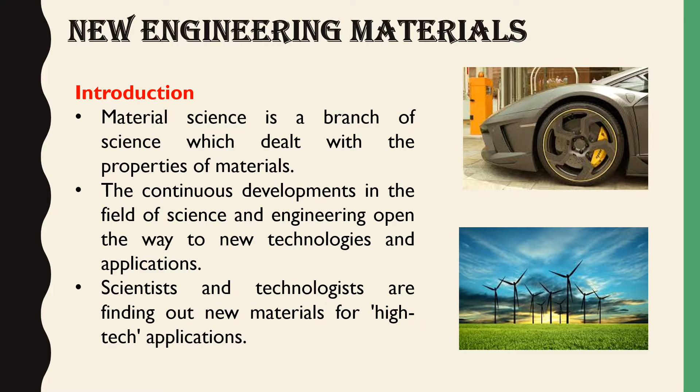Fast growing fields such as electronics, photonics, photoelasticity, fiber optics, and laser technology require efficient and stable new engineering materials. Hence, they must possess novel properties like large optical nonlinearities, optoelectronic properties, high sensitivity to light, and large thermal and electrical conductivities. They should also have good mechanical strength, toughness, ductility, and lightness.

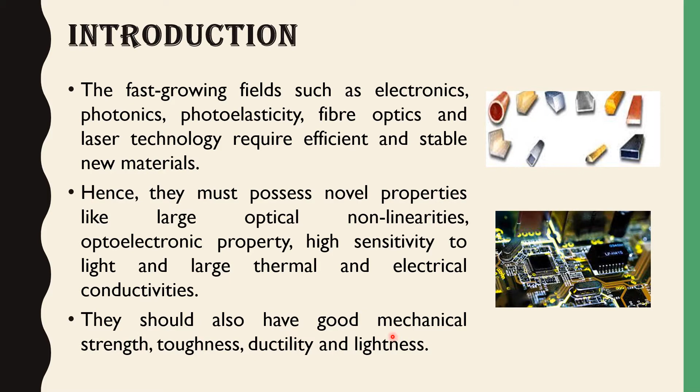Materials used in high-tech applications are usually designed for maximum performance and are normally expensive. Examples include titanium alloys for supersonic aeroplanes, magnetic alloys for computer disks, and special ceramics for the heat shield of space shuttles.

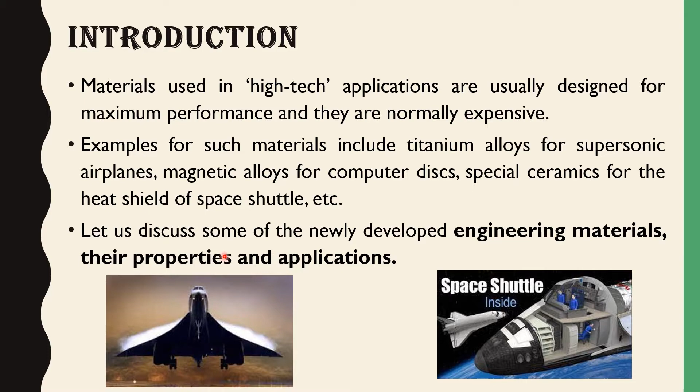Let's see some newly developed engineering materials, their properties and applications.

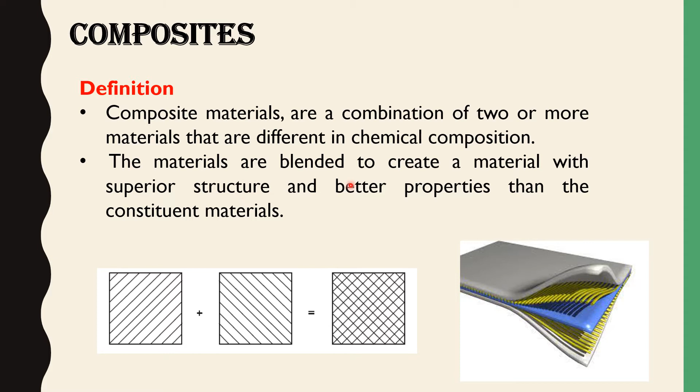Composites are a combination of two or more materials that differ in chemical composition, blended to create a material with superior structure and better properties than their constituent materials. Composite materials can combine plastics, metals, fibers, or ceramics. However, the properties of a composite material depend on the properties, structure, and proportion of its constituent materials.

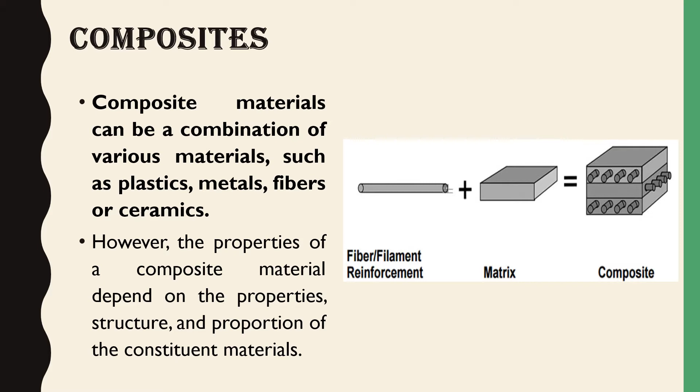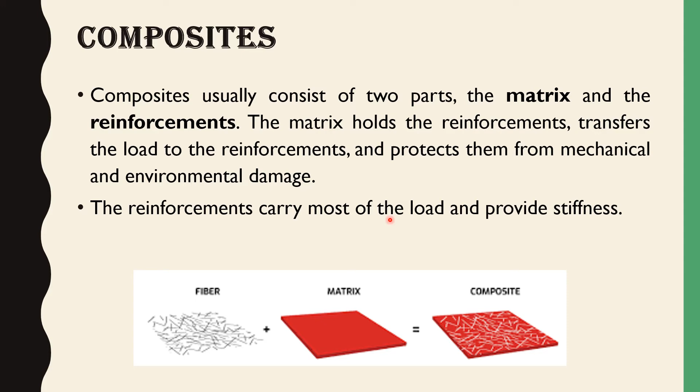Composites usually consist of two parts: the matrix and the reinforcements. The matrix holds the reinforcements, transfers the load to them, and protects them from mechanical and environmental damage. The reinforcements carry most of the load and provide stiffness.

Some composite materials exhibit better properties than their constituent materials such as metals or plastics. Therefore, composite materials are preferred over other materials in applications such as aircraft manufacturing, space vehicles, electronics, and sporting goods.

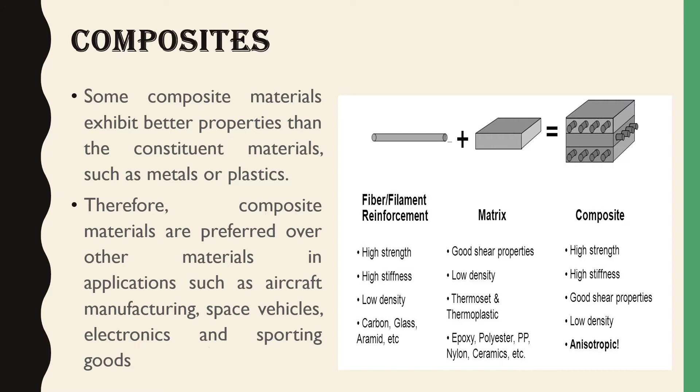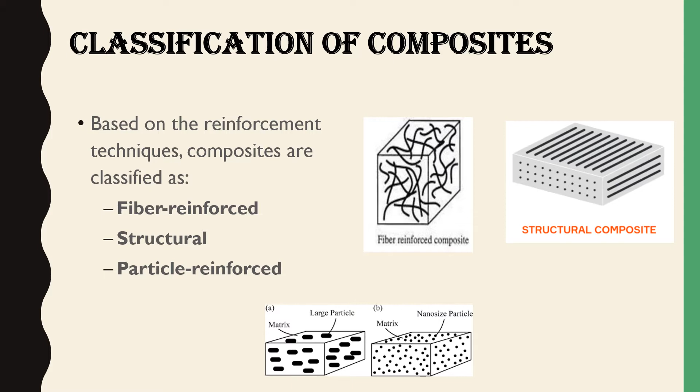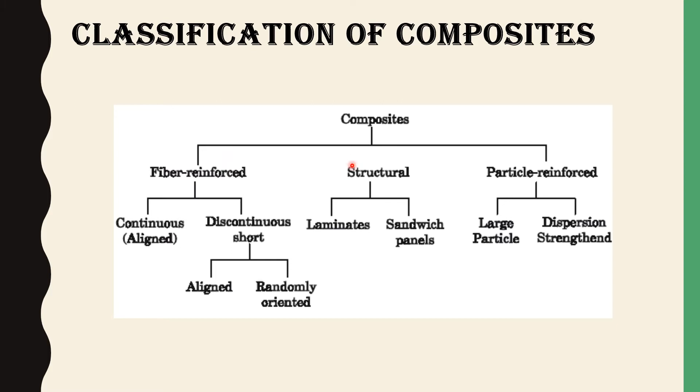Classification of composites: based on the reinforcement, composites are classified as fiber reinforced, structural reinforced, and particle reinforced. This picture shows the classification of composites based on fiber reinforced, structural, and particle reinforced types, along with their sub-classifications.

Fiber reinforced composites consist of thin fibers of a material suspended in a matrix of another material. The matrix is the medium or substance in which the fibers are suspended.

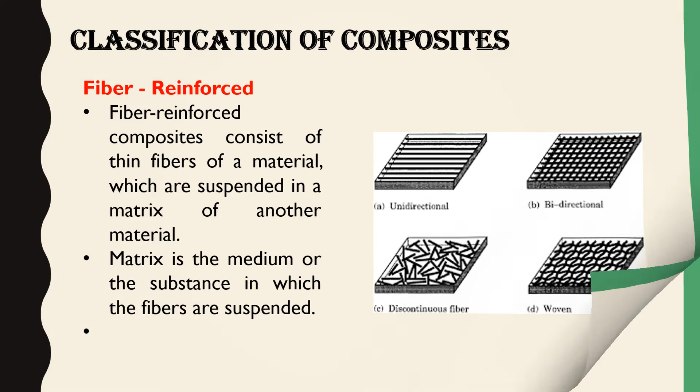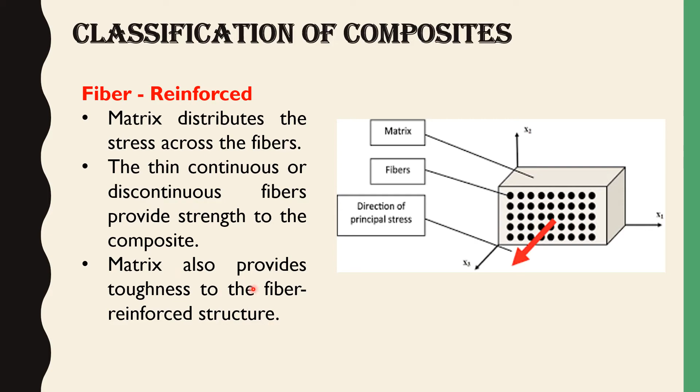In fiber reinforced composites, the matrix distributes stress across the fibers. The thin continuous or discontinuous fibers provide strength to the composite, while the matrix also provides toughness to the fiber reinforced structure.

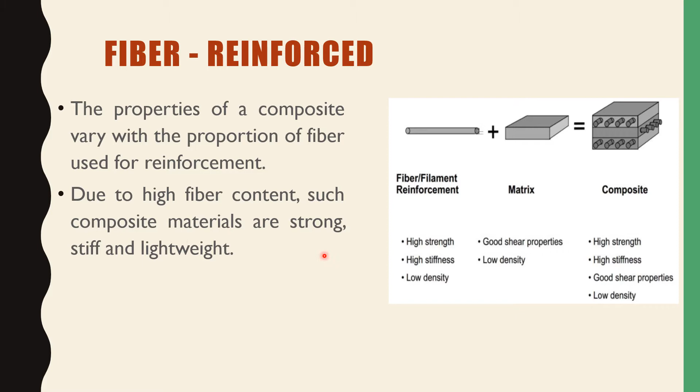Properties of a composite vary with the proportion of fiber used for reinforcement. Due to high fiber content, such composite materials are strong, stiff, and lightweight.

Classification of composites based on matrix materials. In composites, the matrix phase serves important functions. First, it binds the reinforcement fibers together. It also acts as a medium that transmits and distributes external loads to the fibers.

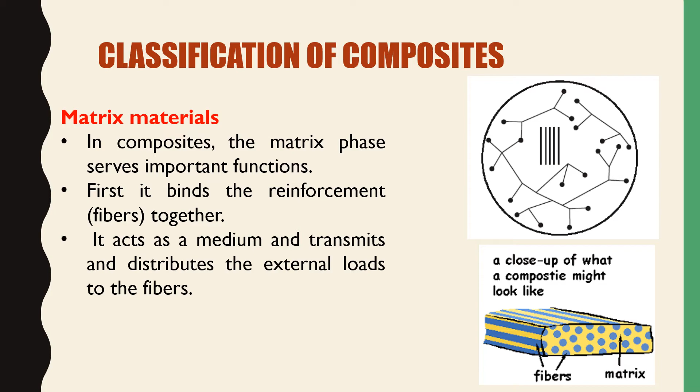Only a very small proportion of applied load is sustained by the matrix phase, as the reinforcement takes up the bulk of the applied load. The matrix material should be ductile.

The second function of the matrix is to protect the individual fibers from surface damage due to mechanical abrasion or chemical reaction with the environment.

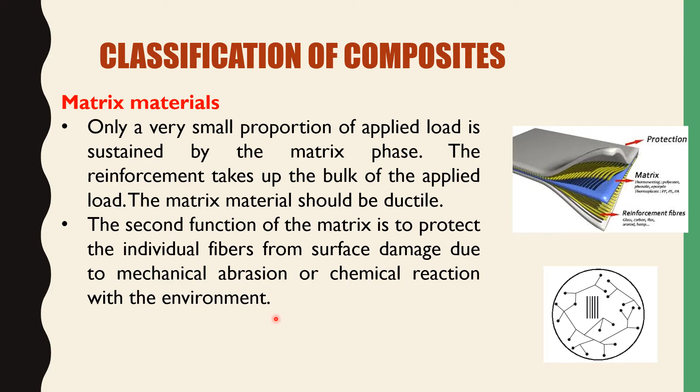Reinforced materials: in composite materials, the reinforcement is responsible for higher strengths. The two main forms of reinforcements used are fibers and particles.

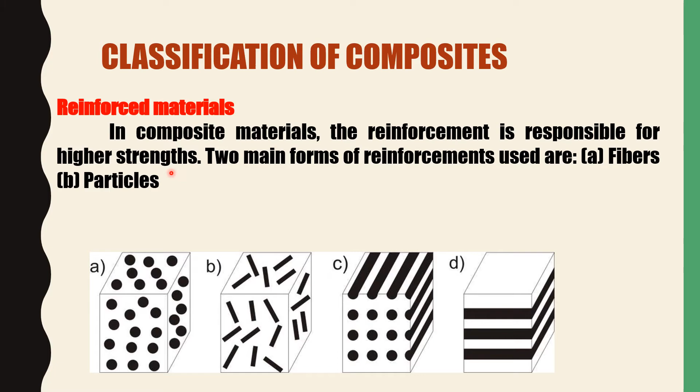Fibers used for reinforcing have high tensile strength. Based on diameter and character, fibers are classified into three types: whiskers, fibers, and wires. Whiskers are very thin crystals with extremely large length to diameter ratios. Fibers may be either polycrystalline or amorphous materials having small diameters, and are generally either polymers or ceramics. Wires relatively possess large diameters compared to fibers.

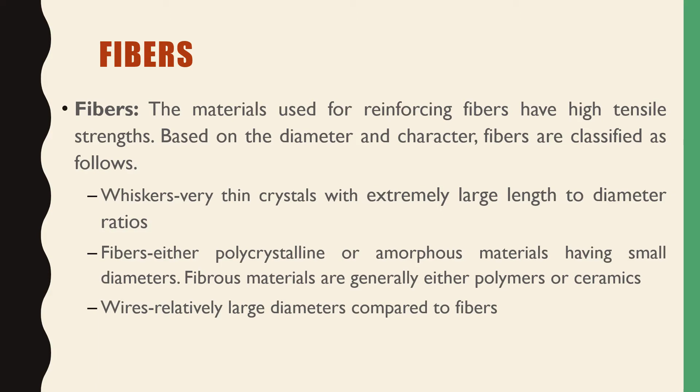Particles having sizes of up to 1 micrometer or more, in concentrations of 20 to 40%, have been used in composites. Several metal particles such as tungsten, chromium, and molybdenum can be suspended in a ductile matrix.

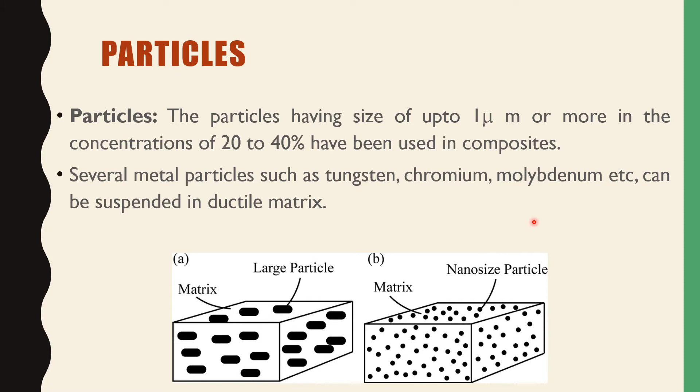Polymer matrix composites. The matrix material is a polymer reinforced by ceramic. Example: carbon or glass fiber reinforced with plastics.

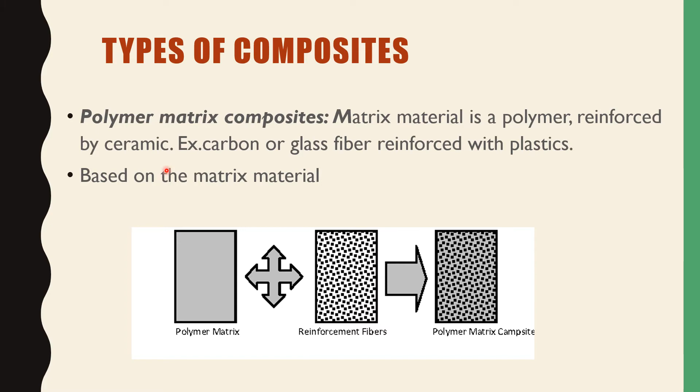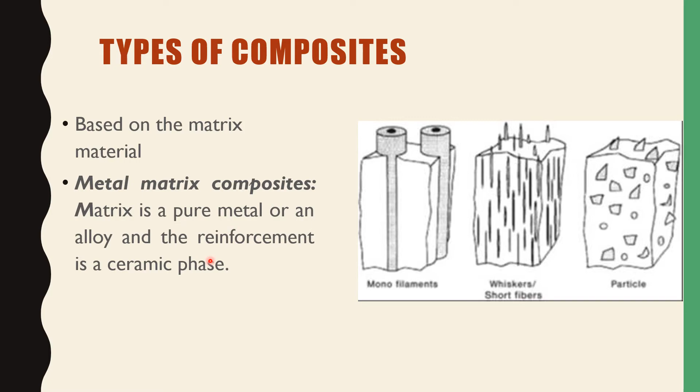Based on matrix material, we are going to see the types of composites. Metal matrix composites: here the matrix is made up of a pure metal or an alloy and the reinforcement is a ceramic phase.

Ceramic matrix composites. Here the matrix and reinforcements are both made up of ceramic materials.

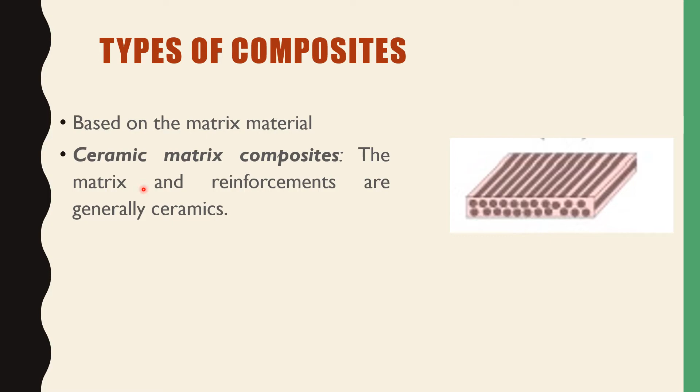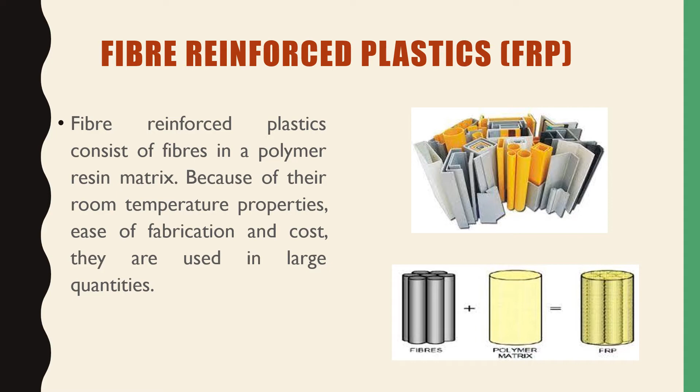Fiber reinforced plastics consist of fibers in a polymer resin matrix. Because of their room temperature properties, ease of fabrication and cost, they are used in large quantities. The commonly used fibers are glass fiber, aramid fiber and carbon fiber.

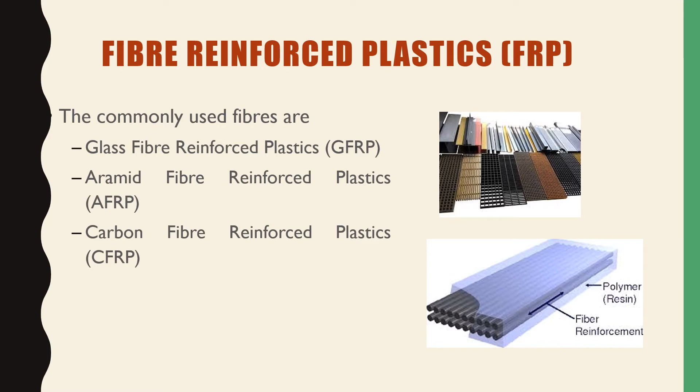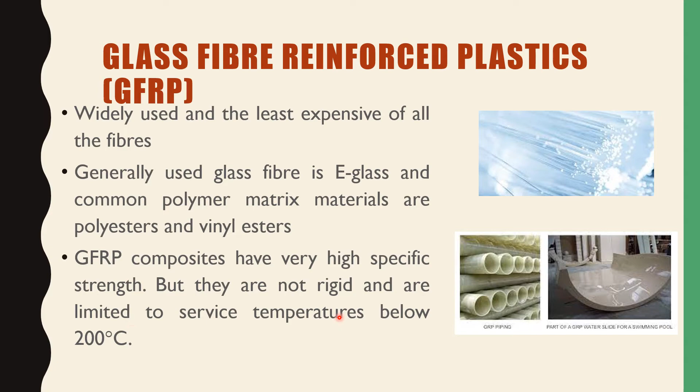Let us see about glass fiber reinforced plastics. They are widely used and the least expensive of all the fibers. Generally used glass fiber is e-glass, and common polymer matrix materials are polyesters and vinyl esters. GFRP composites have very high specific strength, but they are not rigid and are limited to service temperatures below 200 degrees centigrade.

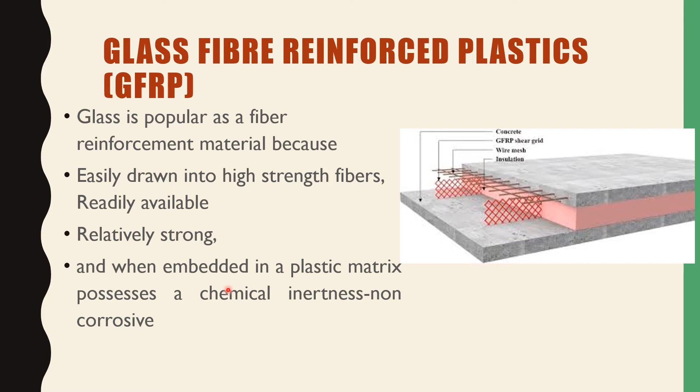Glass is popular as a fiber reinforcement material because they are easily drawn into high strength fibers, they are readily available, relatively strong, and when embedded in a plastic matrix, they possess chemical inertness and non-corrosive nature.

Applications of GFRP: they are used in automotive and marine bodies, leaf springs, pipes, storage containers, sporting goods, and industrial floorings.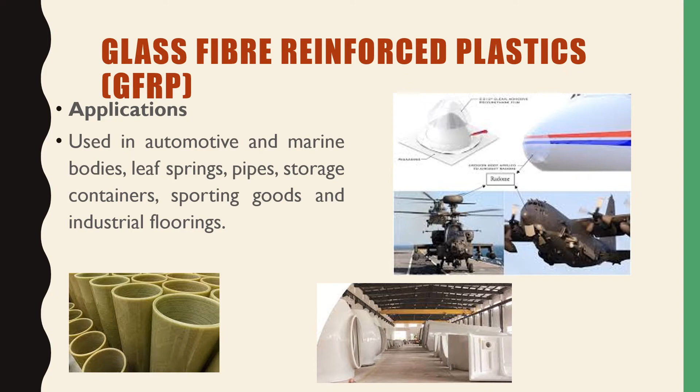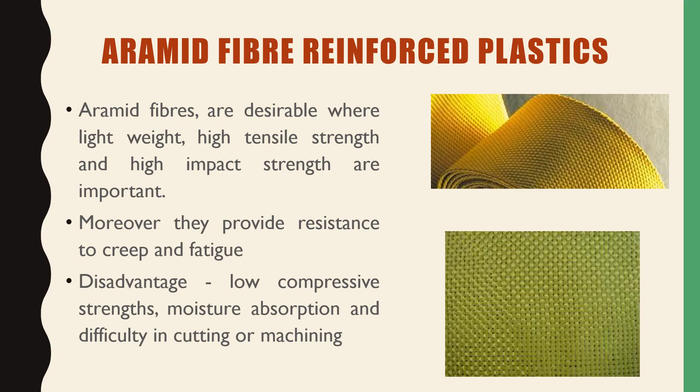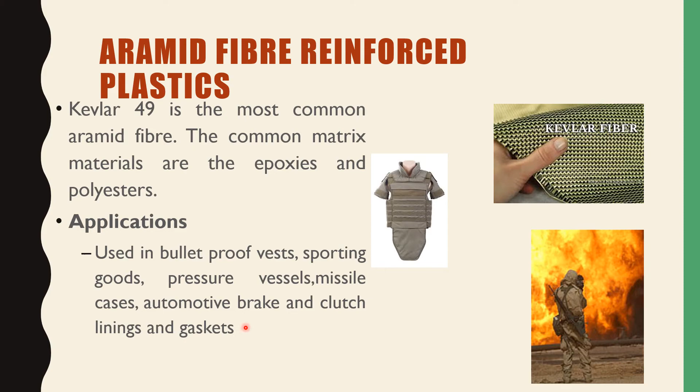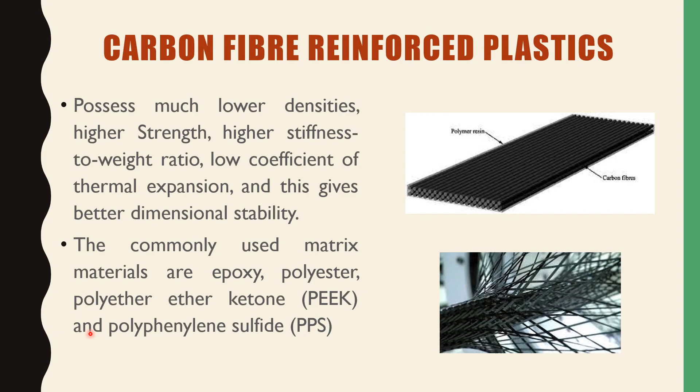Carbon fiber reinforced plastics possess much lower densities, higher strength, higher stiffness to weight ratio, low coefficient of thermal expansion, and this gives better dimensional stability. The most commonly used matrix materials are epoxy, polyester, polyether ether ketone, and polyphenylene sulfide.

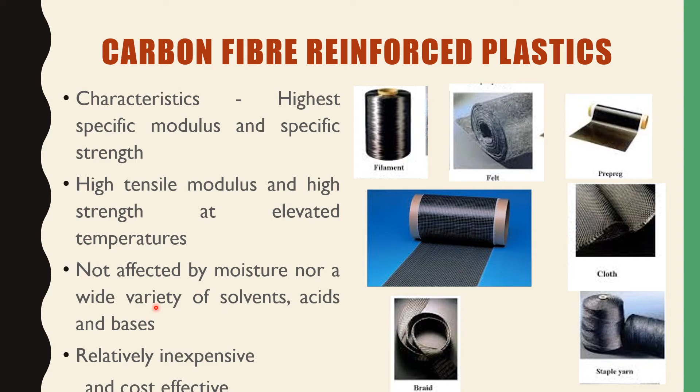The important characteristics of CFRP are they possess higher specific modulus and specific strength, high tensile modulus and high strength at elevated temperatures. They are not affected by moisture nor a wide variety of solvents like acids and bases. They are relatively inexpensive and cost effective also.

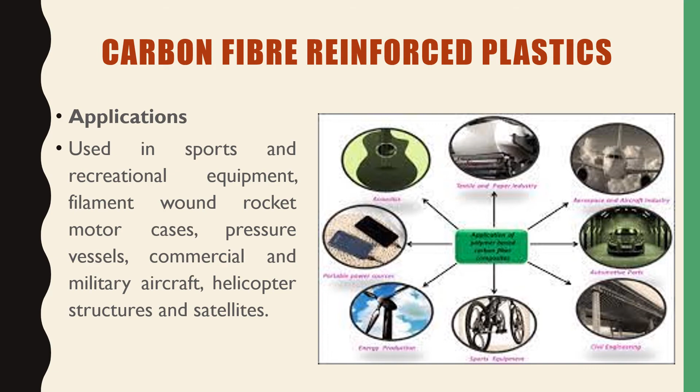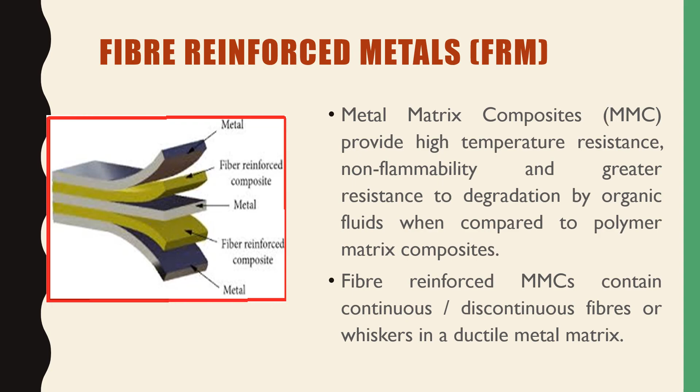These composites offer high strength and stiffness, low coefficient of thermal expansion, and enhanced resistance to fatigue, abrasion, and wear. They also give high heat resistance and improved electrical and thermal conductivity.

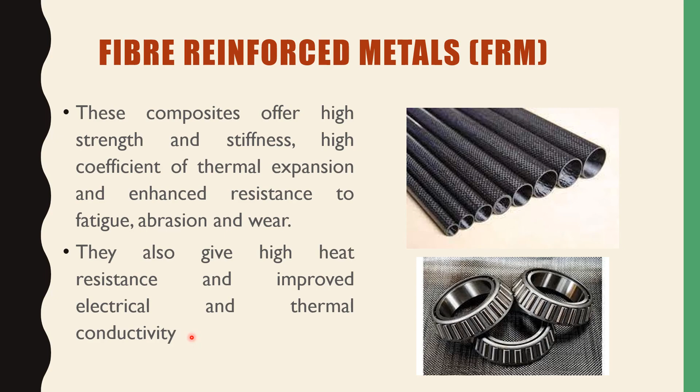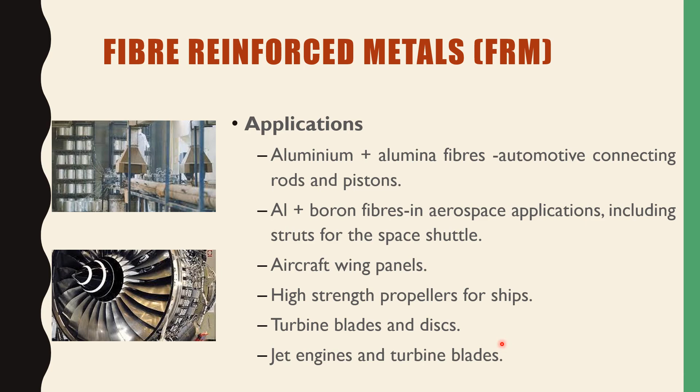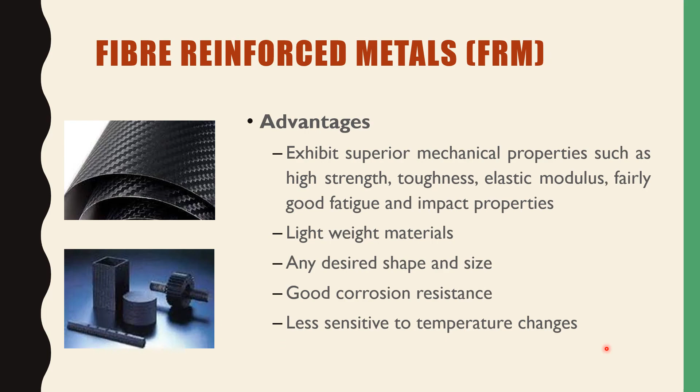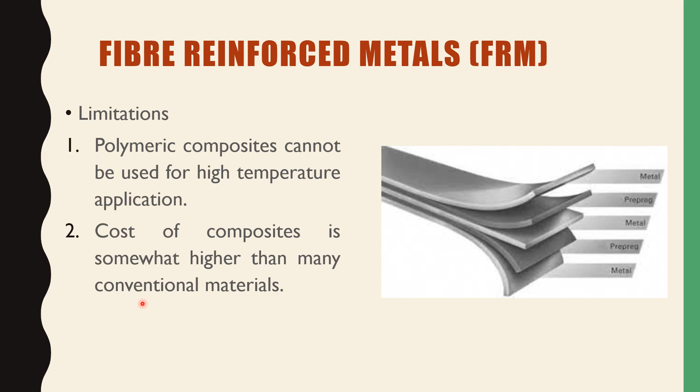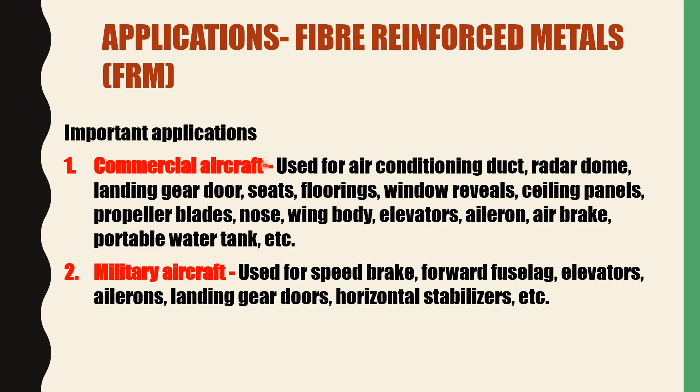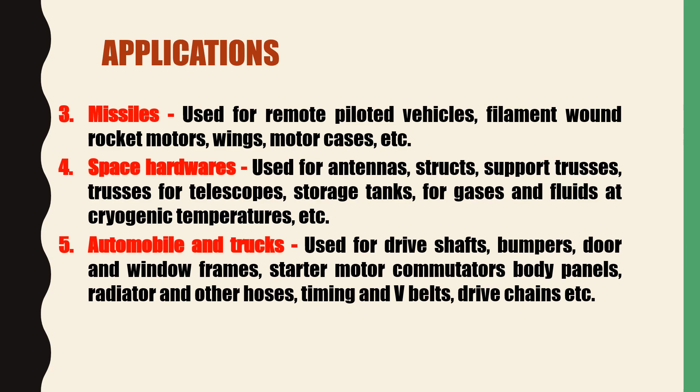Important applications in various fields: they are used in commercial aircraft, military aircraft, missiles, space hardware, automobiles and trucks. Composite materials have wide application in many fields, which can be seen here.